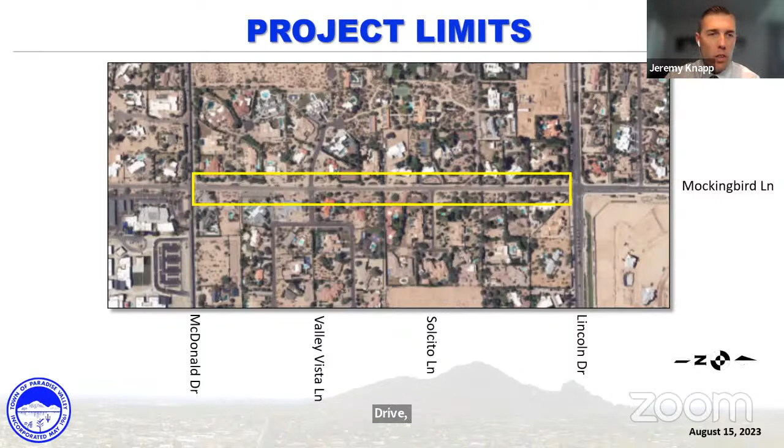Today's request for project scope change includes 3 main aspects. First is focusing on improving existing pedestrian facilities in the corridor in lieu of adding new or more facilities. Second is to introduce traffic calming measures for the pedestrians that do use the existing facilities. Third is to realign the project schedule into its original fiscal year 24 obligation.

The original project scope included new sidewalk on the east side of the road, bike lanes, ADA improvements to an existing sidewalk on the west side of the road, new curb and gutter, and some low water crossings. The original cost estimate in 2019 was $1.3 million. The new project scope, currently at 95% design, includes full width bike lanes for the corridor, ADA improvements to the existing west side sidewalk, new curb and gutter, and low water crossings. In addition, we've done some narrowing of roadway lanes.

We've added a mini roundabout and some speed signs to address concerns for speeding in the corridor. To summarize, the main difference is to no longer include the proposed sidewalk on the east side of the road, to narrow the roadway lanes to 10 feet, and add a mini roundabout at Valley Vista and speed signs along the corridor. Since the project was originally approved in 2019, there have been significant price increases for construction costs, and the town does intend to request closeout funding in fiscal year 24. The updated cost estimate is $3.2 million.

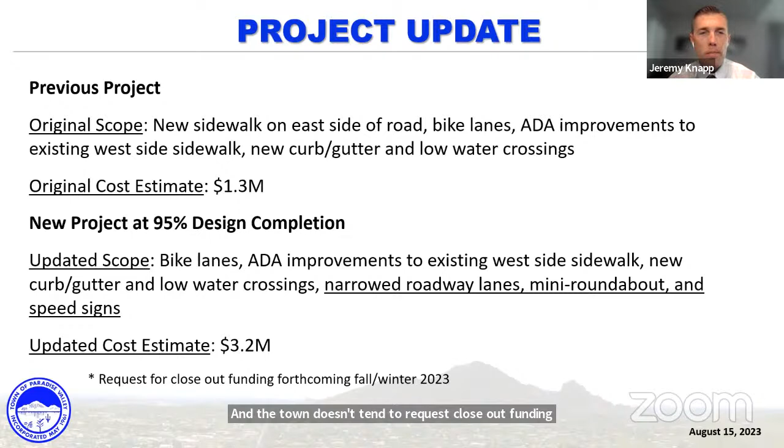Here's a plan view of the proposed mini roundabout at the intersection of Mockingbird Lane and Valley Vista to help with traffic calming in the area. This particular corridor is limited with right-of-way width, and without acquiring new right-of-way, a mini roundabout is the only option that we had at this particular intersection.

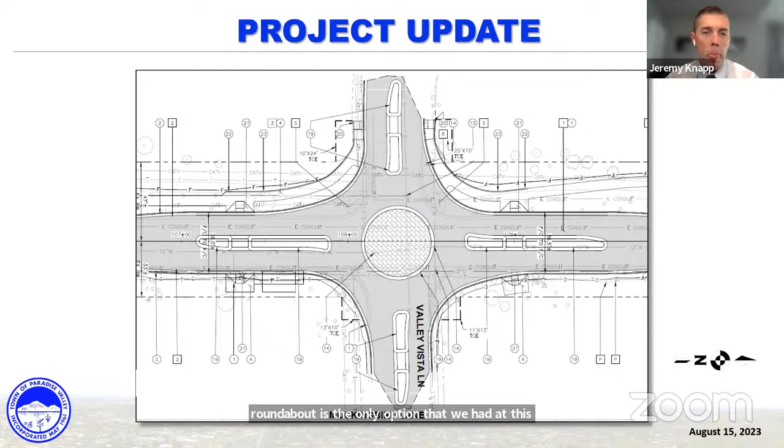The town prides itself on having robust public discourse for all aspects of its local governance. Specifically for CIP projects, public outreach often includes multiple public meetings and often one-on-one meetings with residents who own property adjacent to the town's projects.

For this project, the town held 3 public meetings, virtually and in person, presented the project to the Planning Commission and took public comment, as well as to Town Council.

Residents requested the town focus on adding traffic calming measures and improving the existing pedestrian network, the west side sidewalk and bike lanes, in lieu of adding an additional sidewalk on the east side of the road, which would impact those property owners on the east side of the road.

Additionally, the town's engineering division, which manages its capital projects, had significant staff turnover in a very short period of time, near the 60% design of this project. Unfortunately, this caused some projects to slow down or even halt as new staff came aboard and familiarized themselves with the projects, meaning the town was unable to finish design per the request for fiscal year 23 closeout funds.

The current project schedule is as shown. We received environmental clearance in June of this year. We've delivered 95% plans to ADOT in July and are expecting a comment resolution in September. We also delivered 95% plans to utilities for relocation purposes and conflict review. By removing the east side sidewalk, we've significantly reduced the utility relocations necessary for this job.

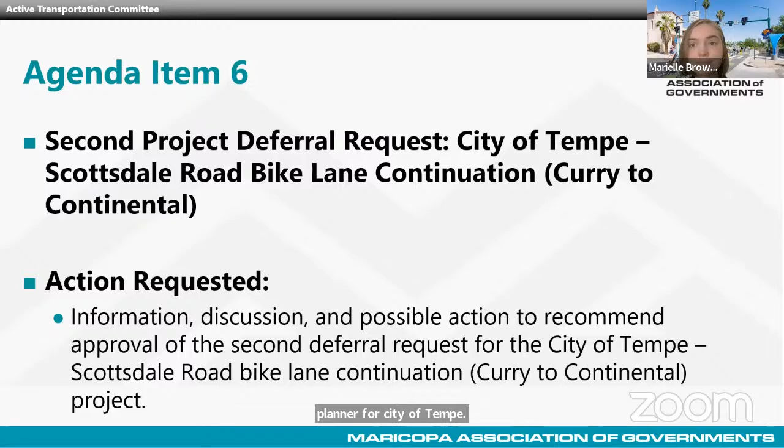Thank you, Chair. As stated, this is a second project deferral request from the City of Tempe for the Scottsdale Road Bike Lane Continuation Project from Curry to Continental. This project was awarded funds as part of the 2017 Regional Competitive Programs for Active Transportation Call for Projects. MAG federal programming guidelines permit the sponsor agency to defer a project one time without justification. However, if the sponsor agency wishes to defer a project for a second time, an appeal process is required, which includes presentations through the MAG committee process. The member agency presentation is required to address the following: identification and explanation of specific problems beyond the control of the agency other than financial issues, demonstration of financial commitment to the project, a revised schedule and plan that addresses the specific issues identified, and if a project has been previously deferred, a demonstration of the previous cause of delay or an explanation of how the revised approach will address the problems causing that delay.

Chase Walman with the City of Tempe will present the city's second project deferral request, and Patrick Stone and I are also available to answer any questions. With that, I would like to turn it over to Chase Walman. Thank you, Kay. Good afternoon, Chair, members of the MAG Active Transportation Committee. As Kay said, I'm Chase Walman, Principal Planner with the City of Tempe, and thank you for the opportunity today to present Tempe's second deferral request of our Scottsdale Road Bike Lane Continuation, Curry to Continental project. Next slide, please.

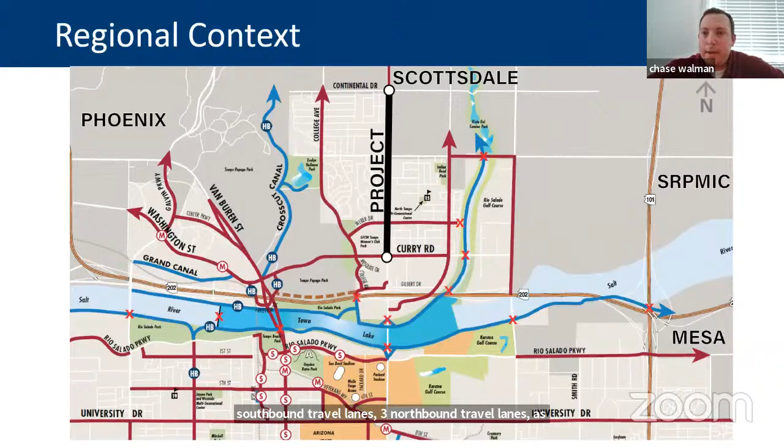This project is along Scottsdale Road, which is a 7-lane arterial road. It currently features 8-foot sidewalks on both sides, 3 southbound travel lanes, 3 northbound travel lanes, as well as a 2-way left turn lane, which is broken up periodically by landscape medians.

This slide is showing the proposed improvements for the project. As I said, the total length of our corridor is about 1.25 miles, and we're proposing both dedicated bike facilities as well as pedestrian improvements along the corridor.

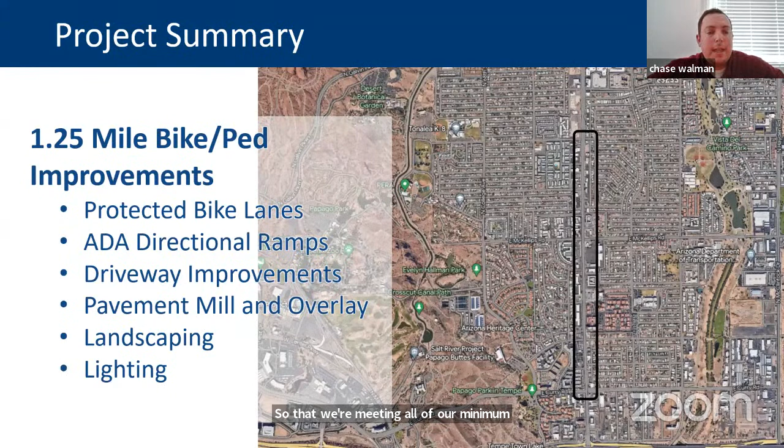Some of those examples include protected bike lanes, ADA accessibility improvements which include directional ramps, as well as driveway wraparounds at the commercial driveways. There will be a pavement preservation project along the corridor. We will also be supplementing the existing lighting so that we're meeting all of our minimum illuminance levels needed on the street, and then increased landscaping as well.

This project is not only significant for the city of Tempe, but significant for the region as a whole. We're excited to be piloting protected bike lanes along this corridor. We have short segments where we had protected bike lanes before, but this is really our first pilot for a continuous corridor of protected bike lanes, so that's very significant for us to test that out and see how that operates.

In addition, to the north, as I said, the project connects directly to the city of Scottsdale. City of Scottsdale already has existing bike lanes, so this would continue those existing bike lanes north into the city of Scottsdale, which currently terminate around Thomas Road.

To the south, the project connects to existing bike lanes at Curry, and these bike lanes directly connect to two regional off-street pathways. To the west, we have the regional Crosscut Canal Path. To the east, we have the Indian Bend Wash Path, which has regional connections to the city of Scottsdale.

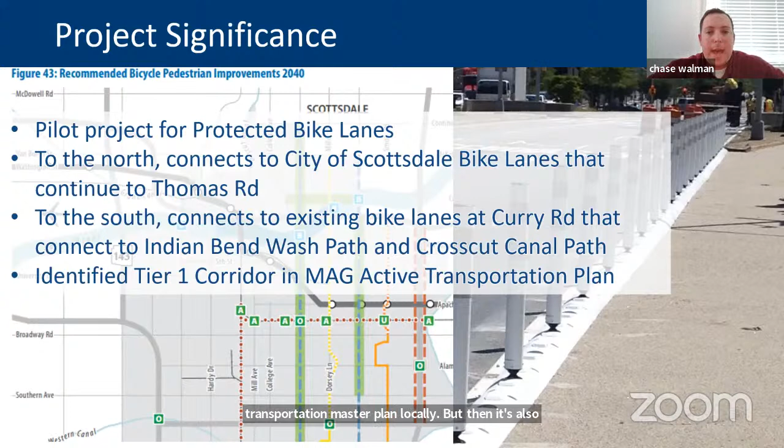It's identified in our long-range plan and our transportation master plan locally, and it's also identified regionally in the MAG active transportation plan as a tier 1 corridor.

This project was originally programmed for construction in FY21. We kicked off the design in 2020 and requested our first deferral from fiscal year 21 to fiscal year 23, which was approved April of 2021.

We held our first round of public meetings in November. Originally, what we were proposing were standard bike lanes along the corridor, which reduced the width of the travel lanes, as well as had some extensive modifications to our existing medians. It was evident from that public outreach that there was more than just a standard bike lane desired.

There was a request to add buffer, not only beside the standard bike lane, but also to have additional protection since it is an arterial road. There were also additional sensitivities about extensive modifications to the mature landscaping in the existing landscape medians.

So with that, in order to achieve the project's intent, as well as provide for those ADA accessibility improvements like the driveway wraparounds, we identified additional right-of-way that would be needed that was not originally scoped with the project. We completed our 30% design with that new right-of-way scope.

We started the right-of-way process, which included getting appraisal reports, title reports, and beginning negotiation with property owners to acquire all the right-of-way, as well as temporary construction easements needed for the project. We finished 60% design in August 2022, as we were concurrently working on all the right-of-way tasks.

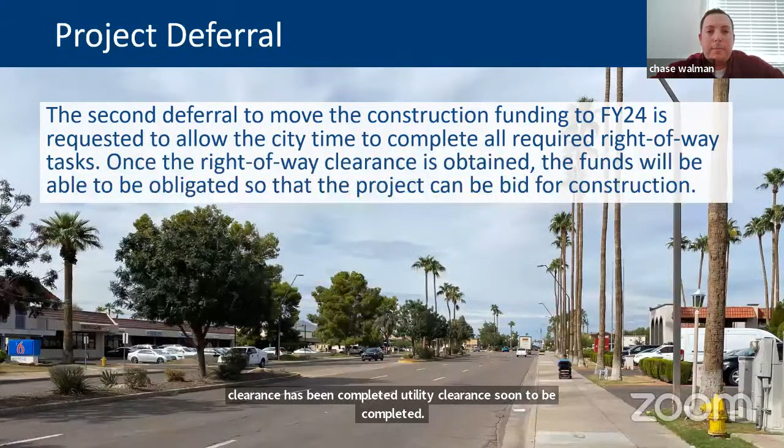Again, all the design to date and other utility clearance will soon be completed. So this is really the last remaining task for us to complete before we are able to obligate the project and get it bid for construction.

The city does remain committed to this project. We continue to reappropriate all of the local match and contingency funding for the project. In addition, with that expanded right-of-way scope, we have identified the additional funding necessary for the right-of-way acquisition to make the improvements to the project, as well as having project management staff assigned through the completion of the project.

So our new proposed schedule: we have completed our final plan specifications and estimates for the project. We anticipate utility clearance in September of 2023. We continue to acquire the right-of-way needed and finish negotiations with property owners, so we anticipate right-of-way clearance coming in February of 2024. With that schedule, we would anticipate a notice to proceed for our contractor in September of 2024, ending construction in the summer of 2025.

To reiterate our request, we're asking your consideration to move this project's construction from FY23 to FY24. I welcome any questions the committee may have. Thank you.

Thank you. Are there any comments or questions for MAG or city staff before we entertain a motion? It looks like Susan, or... Oh sorry, I thought Grant was going to go first. I saw your hand first, Susan. Oh sorry, okay, thank you, Chase.

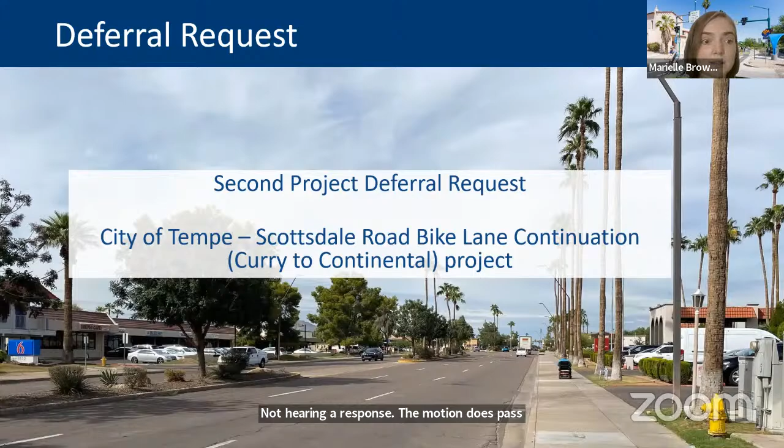Great, thank you Kay, and thank you Tempe. So that takes us to the 7th item on the agenda today, a third deferral request from the City of Phoenix for the Van Buren Street project. This will be presented by Kay Bork and Leticia Vargas, Special Projects Administrator, City of Phoenix. This item is on the agenda for action, so over to you, Kay.

Thank you, Chair. This item is on the agenda for committee action, and it's a third deferral request from the City of Phoenix for Van Buren Street, 7th Street to 24th Street project. This project was awarded funding as part of the 2015 Regional Competitive Programs Active Transportation Call for Projects. This is the second time the committee has heard a third deferral request. As detailed in the transmittal summary, the first project deferral was approved October 2019, and the second project deferral was approved in February of 2022.

The MAG federal programming guidelines permit the sponsor agency to defer a project one time without justification, and additional deferrals require the sponsor to successfully complete an appeals process through the committees. The committee or member agency presentation is required to address the following: identification and explanation of a specific problem or issue that is beyond the control of the agency other than financial, demonstration of financial commitment to the project, a revised schedule and plan that addresses the specific issue identified, and if a project has been previously deferred, demonstration that the previous cause of the delay has been addressed, or an explanation of how that issue will be addressed. Leticia Vargas with the City of Phoenix is here to present the city's third deferral request. Patrick Stone and I are also available to answer any questions. And with that, I'd like to turn the presentation over to Leticia.

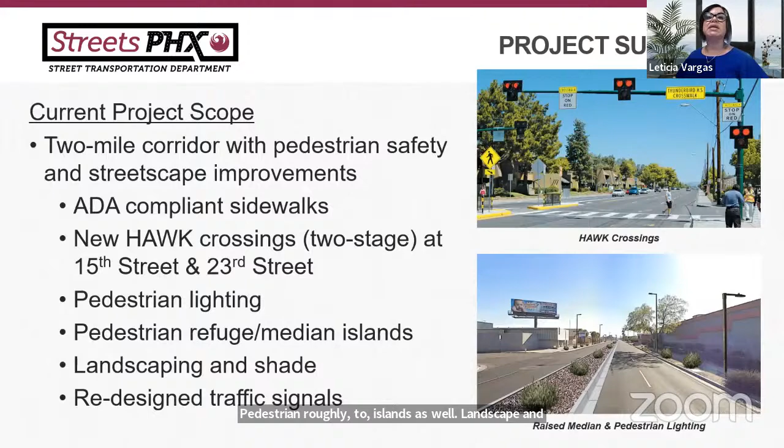Just south of our project corridor is one of the city's first city parks, East Lake Park, and the East Lake neighborhood, located near Jefferson Street and 16th Street, which was the center of the African-American community and the civil rights movement in Phoenix. Our former esteemed Councilman Calvin C. Goode, who served on our Phoenix City Council for 22 years, lived in the East Lake neighborhood from 1955 until he passed in 2020.

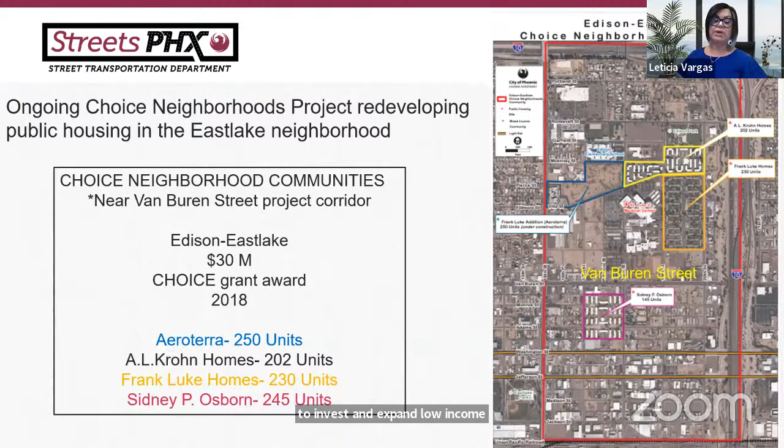So then let's get into our project timeline and see what has happened over the last couple of years. In 2015, the city of Phoenix initiated a Reinvent Phoenix plan. A plan that came directly out of that effort was the East Lake Garfield transit-oriented plan, which proposed Van Buren Street as a complete street. As a result of that, our department, the Street Transportation Department, initiated a pre-design effort.

With that effort, we had 2 public processes. As a result, the city of Phoenix applied for a transportation alternative grant for Van Buren, a bicycle pedestrian corridor project. The project was awarded $2.3 million in December of 2015. We kicked off our project in 2017, about the November timeframe.

We went through project delivery efforts, received our NEPA clearance in July of 2019. It was then that the city made a conscious decision to do a first deferral in October, mainly due to public input and political climate changes.

In 2020, the city of Phoenix initiated a community outreach process as a direct result. What we found was that we had a lot of differing opinions at that time, and the meetings that were held were in March and August of that year. At that point, the city decided to pause the project to reconsider the scope and the sentiment of the community, and really engage in a public engagement process.

So I want to point out some items that were outside of our control. You can see that the public input process and the need for numerous public processes impact our project delivery. Keep in mind, we had over 8 public meetings in this project alone, and that's not typical for an average project. But the city remained committed to work with our elected officials and the community groups to listen and engage.

To be sensitive to the community at large, it was in 2021 that we had the listening opportunity to really try to make sure we understood exactly what the community wanted. At that point, we were notified that safety was the key priority for this community. In fact, they felt inadequate street crossings were a major concern for the residents. For that reason, we've updated all of our signals along this corridor and have included 2 new HAWKs to address the safety concerns. Final design of the signals also impacted parcels list.

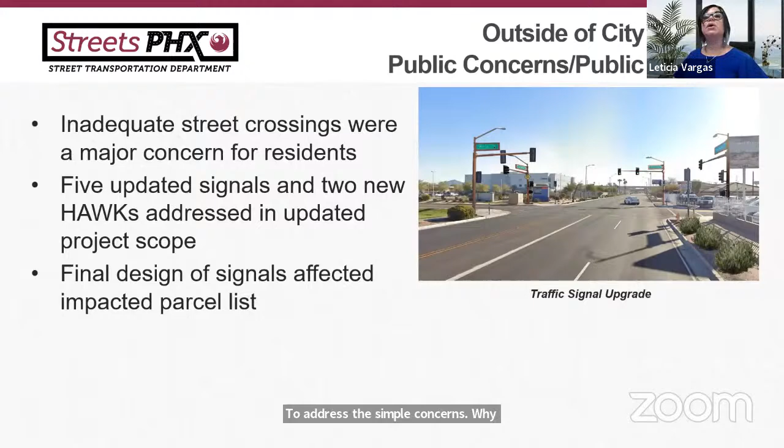Another item outside of our control are the right-of-way constraints. As I mentioned at the beginning, Van Buren Street currently is a 5-lane arterial with essentially 80 feet of right-of-way. At a 30% design, without any of the scope additions, we identified 9,100 square feet of TCEs to accomplish the scope that was identified at 30%. After 60%, we realized that our TCEs nearly doubled to 17,800 square feet of TCEs.

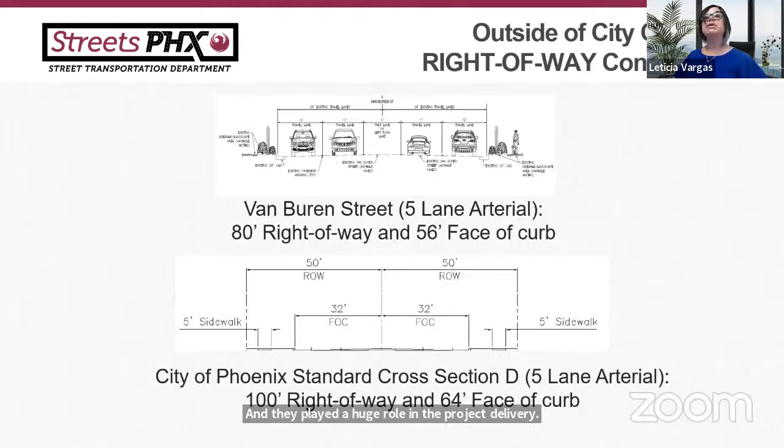The right-of-way constraints essentially have been our critical path in this project, and they played a huge role in the project delivery, which is what we have aimed to get back on track.

So here's a summary of the current deferral request. The city of Phoenix requested a first deferral to allow for community input and public processes to happen, and that was achieved by regional council in October of 2019. The city of Phoenix requested a second deferral for scope changes to respond to the community feedback and focus on pedestrian safety, and that was approved in regional council in February of 2022. The city of Phoenix is now requesting a third deferral to realign the project schedule to address federal clearances and utilities in right-of-way based on the impacts of the revised scope through the public process.

The city is committed to complete this project. That is, we are committed to fulfill a commitment made to deliver a pedestrian safety and enhancement project on Van Buren from 7th Street to 24th Street. We're committed to fund the Van Buren project through local participation identified and committed through the city's capital improvement program. We are committed to allocate adequate staff resources to the completion of this project. And separate, but just as important, we're committed to evaluating a parallel bike boulevard project that is about a quarter mile north of our project.

Again, currently in design, but separate from this project.

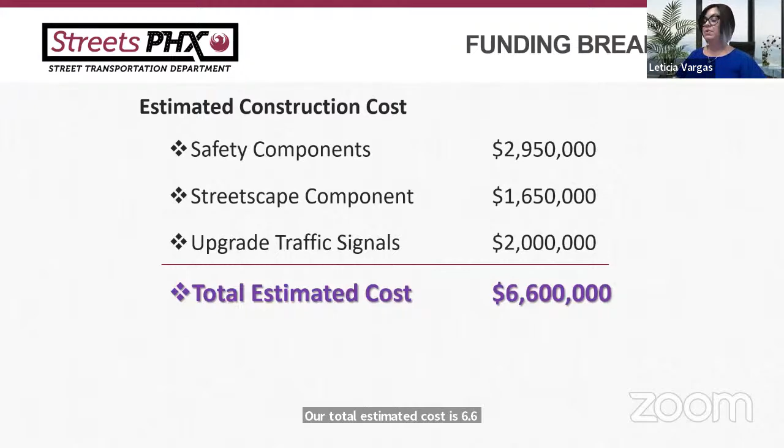So here's a summary of our project schedule. With comment resolution expected in the next month or so, we will be at 60% full design in September of 2023. Utility clearances are expected in November of 2023. 100% design is expected in December of 2023. Our right-of-way clearance is expected in September of 2024.

Environmental clearance has already been achieved as of March of this year, but because of the PISA requirement, a technical report that's required, we'll need to do a refresh, and we're targeting January of 2025 to do that. We're targeting obligation for construction in February of 2025, and we're expected to go to construction in spring, summer of 2025.

With that, I'd like to respectfully request approval by the MAG Active Transportation Committee for a third deferral request of the Van Buren project, 7th Street to 24th Street. I am available to answer any questions you may have. Thank you.

Thank you, Leticia. Are there any comments or questions for MAG or city staff before we entertain a motion?

Madam Chair, Justin from Fountain Hills with a question. Leticia, do you anticipate that you will be asking for additional funding for this project as it's nearing time to start on it? Or does the city of Phoenix already have obligated funds, or will it be obligated with each budget process moving forward? Currently, Madam Chair and Member Justin, this project is fully programmed with city funds. So at this time, we're only requesting a third deferral.